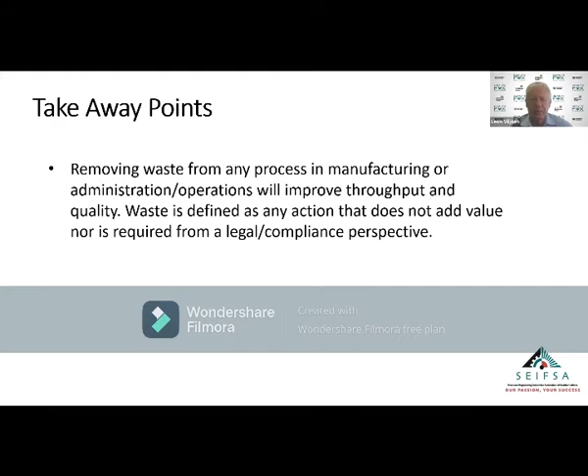Secondly, short interval control is the key to unlocking capacity in any process. Short interval control is not there to force people to work harder, but it is there to pick up and highlight problems and issues as soon as possible. This is very important. People always say, as soon as you speak about short interval control, oh, we're trying to get people to work harder. That's not the case. We actually want to work cleverer. That means we want the problems to come to the surface so we can resolve problems and people can work better and get a better output, but not necessarily working harder, actually just doing what they're supposed to do.

And clear and ongoing communication from the top, especially where the union is involved, is key to the success of improving manufacturing and operations. I've seen this firsthand, that if you involve the union from day one and there's clear and open and honest communication from the top, that they will support you and the project will succeed in the end of the day. But like we've said in previous webinars, communication is key to any change management.

In the previous one, we had partnerships and networking, let's quickly recap before we start with today's webinar. Partnerships can only work and last if they are win-win. No legal agreement will or can save a partnership if it is not built on a win-win foundation. That means there needs to be trust, there needs to be win-win. Because if you go into any partnership and one side wins and the other side loses, that partnership will not last.

A company cannot be everything to everybody, but it has the ability to grow its share of wallet with important customers by forming partnerships. That means by forming partnerships, you get products and services from other companies to go with yours to an important customer of yours. That means you get a bigger share of wallet from your customer and the customer becomes more and more dependent on you. And businesses will always be between people, doesn't matter who says what.

The better you network, the more you understand the needs and wants of your customers, as well as seeing opportunities you would otherwise not be aware of. So networking, although everybody doesn't like networking, networking is extremely important for the success of the company.

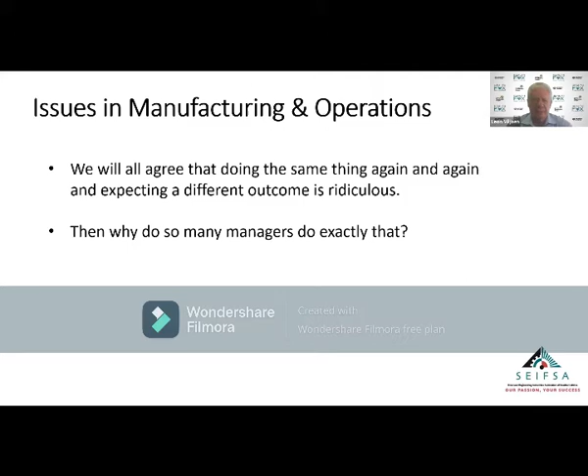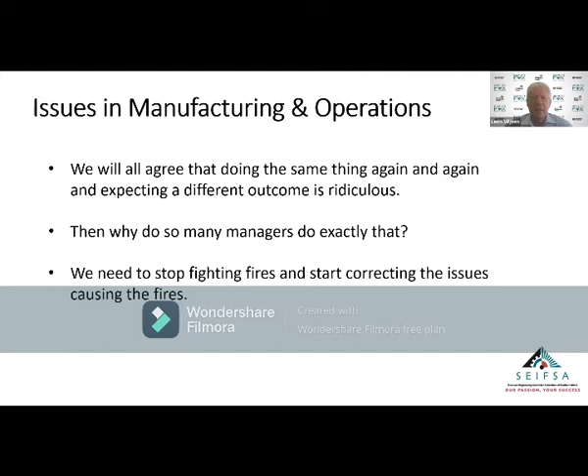Okay, let's get on with issues in manufacturing and operations. We will all agree that doing the same thing again and again and expecting a different outcome is ridiculous. This is a very old saying, and the question I've got is, why do so many managers do exactly that? They carry on with firefighting and do not correct the issues that cause the fires. So if we stop firefighting and focus on what causes the issues, then we will definitely improve the system.

Okay, let's start with it. What is waste? Let's define waste before we discuss it. Any action that does not add value, nor is required from a legal compliance perspective.

Now, in lean methodology, value can be determined by asking three very simple questions. The first question: is the customer willing to pay for the activity? Let's start there. You've got a widget and you drill an additional hole into that widget because you think customers might use that. Now, if customers are prepared to pay for that additional hole, then you're adding value. If they're not prepared to pay for that additional hole, that hole is useless and does not add value to the widget, and that means you must stop doing it. Simple: is the customer willing to pay for the activity?

Does the activity transform the good or service? That means, in your manufacturing, is it part of the transformation of the product, the activity you're doing? If it's not, then it's waste. Is the activity done for the first time? This means if any activity is repeated, that means it's not adding value and it is waste.

A common mistake made by many people is to see company procedures as law. Company procedures must be questioned to see if they add value. If they don't add value, then we need to remove or change them. If they're there from a compliance perspective, it's a different story. But if they're not from a compliance perspective, then we need and must have the ability to question it. And managers must allow people to question company procedures, because we can't afford company procedures that don't add value.

Now, for me, a comparison is waste is like running hurdles in a 100-meter sprint. If you take two athletes that have got comparable times in the 100-meter sprint, and we say to the one, okay, we're going to put in 1 or 2 hurdles in your lane, and you must go over those hurdles while your competitor runs without hurdles. Who do you think will win? Logic, the person without hurdles.

So waste is like putting in hurdles in our processes and our systems. If we don't get rid of them, we will never beat our competitors. We will always be the last one to get to the finishing line.

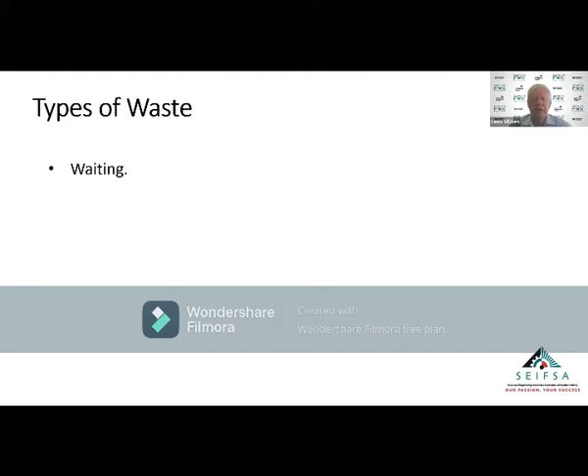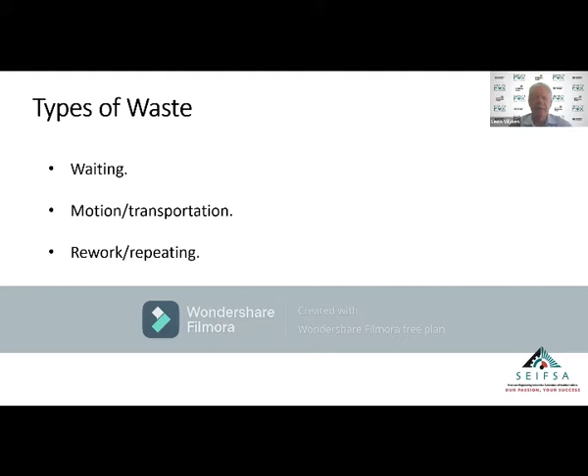Motion, transportation. Getting up to go and fetch something, or transporting a piece of material from point A to point B, and then from point B back to point A, that is waste. So we must make sure we've got the material and everything we need where we need it. Rework, repeating things - that's very logical. Nobody wants to repeat something or rework something because that's waste.

Overproduction or excessive inventory is waste in a company. We don't want to produce things when we don't need them. You want to produce things when you actually need them and when the customer needs them.

Processing, really the variance in processing. And if you've got too big a variance in your processing, that variance is waste, because then you must throw away or discard or rework quite a lot of your product.

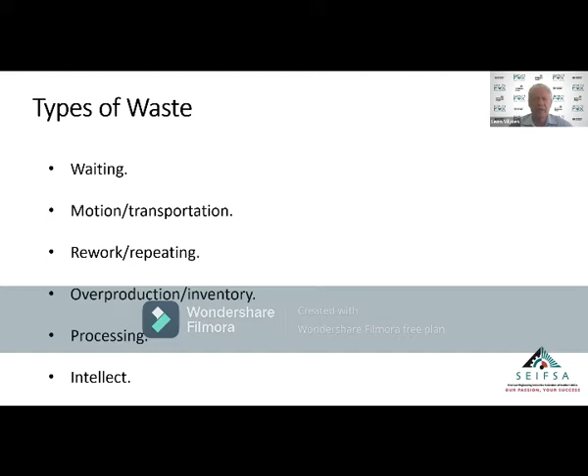And intellect. Intellect might sound very funny to say that's waste, but how many companies use the intellect that's actually in the company? And if you don't use the intellect, that is waste. So let's take these 6 and analyze each one a bit better.

Waiting. Any person waiting for information, approval, or material to continue his or her job is defined as waiting and is defined as waste. This is normally a type of waste that is easily recognizable. When you walk into an office, let's call it a finance office, and you see somebody sitting doing nothing, having coffee, or playing games, and you go to them and say, why aren't you working?

And they tell you, I can't work because I'm waiting for this information, or I'm waiting for approval. That is waste. In manufacturing, if the production is waiting for design, waiting for material, that's waiting and that's waste.

The root cause is not always determined, which results in this type of waste remaining. We see people getting used to, I'm always waiting for this material. So it becomes a norm to wait for that material. But that norm is costing the company money.

By encouraging employees to record the waiting time and the reason therefore on a daily basis, and then analyzing it maybe on a weekly basis, would clearly highlight to you where the problems in the company lie. But that's one thing we don't want to do - we don't want to record our waiting time, because then we'll get somebody in trouble. That is something the culture of the company needs to change, and this recording of waiting time is extremely important, because that can highlight to you where the actual problems are lying.

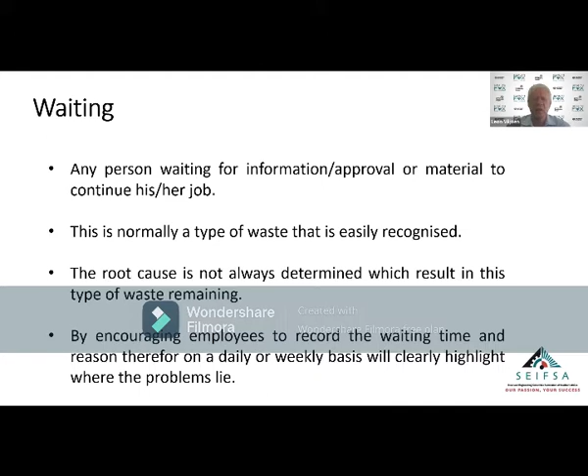Motion, transportation. An example of this is material being unnecessarily moved around.

Let's take an example in the office. If we've got a photocopy machine that's in the corner of the office and everybody needs to walk there to make a photocopy, why don't we put the photocopy machine in the middle of the office? That means everybody is much closer to it and there's much less time wasted. Or we get 2 photocopy machines.

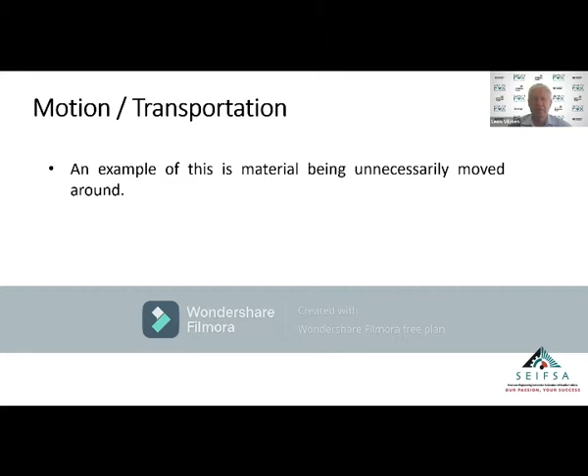People will say, no, but the cost of the photocopy machine. But take that and compare it with the time wasted when people walk around, because they don't only walk to the photocopy machine, then they also walk back and start having discussions with people on the way back. So that is wasted time. This is one of the easiest forms of waste to remove.

Workspace layouts is the big culprit. And in manufacturing, and we'll go through a real example just now, workspace layouts can make a huge difference. And the cost of something like that is not as big as people think. When you get your own staff to assist you and you move things around, you can do good workspace layouts and make it extremely good for people to move as little as possible and for everything to be there, and the impact is dramatic.

Another culprit is work methods. We don't always take the best practice and put it in our documentation. I challenge 99.9% of companies out there that tell me, when somebody joins your company, you take your ISO documentation, you give it to that person, and the new person will know exactly what to do. We expect people, co-workers, to assist that person, to tell them what to do and how it should be done.

But if we're in manufacturing and I need to teach somebody next to me how to do something, do you think I'm going to give all my trade secrets to that person? And that person, with more energy and younger than I am, can manufacture things quicker than I can. And that means I might be retrenched at the end of the day. So people tend to keep the trade secrets.

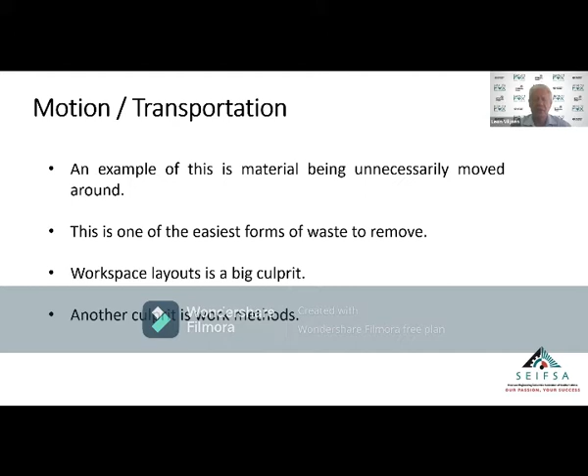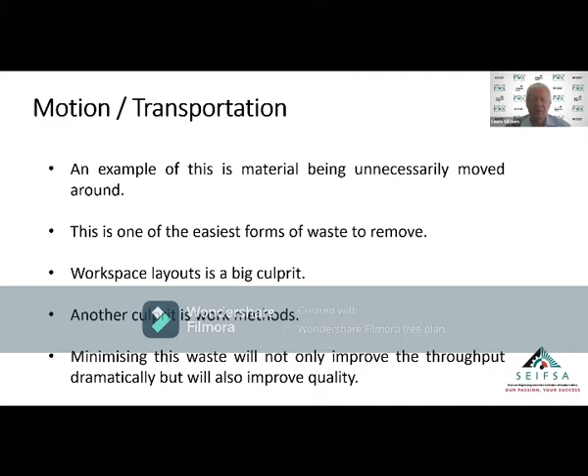And if we don't put those in documentation and get our ISO documentation and procedures actually up to scratch, so that a new person can read them and know what to do, then we haven't succeeded. This is definitely a big culprit of motion and transportation issues. Minimizing this waste will not only improve the throughput dramatically, but will also improve quality. And I will show you in the real example how much quality was improved by just getting rid of some of the waste.

Rework, repeating. That goes without saying, that is a form of waste. Actions repeated because it was not done correctly in the first place, or repeating the approval process without it adding value. And I've put in this approval process here, and I would like to discuss it because it's a big bugbear of mine. We have always got time to redo things, but we haven't got time to do it correctly the first time.

Like I said, one of the biggest culprits is the approval process, and let's have a discussion with it. We've all got limits of authority that err towards the lower side. Now I'm saying let it err towards the higher side, because then you give junior people more authority, but also responsibility and accountability.

As a manager, you need to sign orders, 10 orders a day. That means 50 orders a week. You haven't got time to go through each order properly when you approve it. That means, as an MD, I sometimes said, I'll approve this because the financial director approved it. So you don't really approve it, what is expected of you. So in this case, what I'm saying is, let's make the limits higher.

Expect the person to do not 10 per day, but 1 per day. That means 5 per week, and that 5 can be done thoroughly. And then randomly do maybe 2 or 3 a week properly. That means randomly go into the system and select an order every second day of lesser value that you don't need to approve, but approve it. That means go through it and make sure it's done correctly and approve that order.

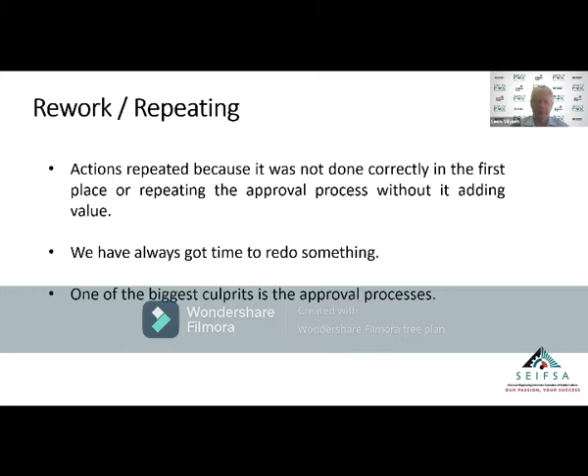Overproduction, excessive inventory - producing too many components or producing them too soon, keeping more inventory than is required. The example I'm going to show you will highlight the impact of getting rid of this, a big cultural change in a company, because we do not allow labor to sit idle and wait for material.

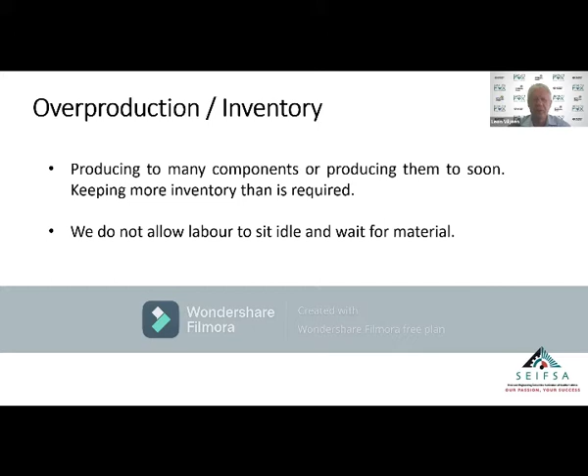Have you ever seen a works manager or production manager walking through a factory, looking at people sitting there reading newspaper during working time and not saying anything? I'll show you an example where this happened and the person was by right allowed to read newspaper because of an issue. The biggest cultural change here is not from the person doing the work, but from management's perspective. Because at times it's better to allow a person to sit idle than to do things that just overproduce, or produce things when you don't need them.

To overcome this waste, production lines must be stopped and problems resolved before they're allowed to continue. So when you've got a production line running and there's a material that's incorrect or a design issue, the whole production line must stop. We connected a buzzer, an alarm system, and a flashing light that went off. That meant the whole company knew there was a problem on the production floor. Production would not continue until that problem was resolved. That means everybody from MD right through the company, every department involved, would be involved in resolving the problem.

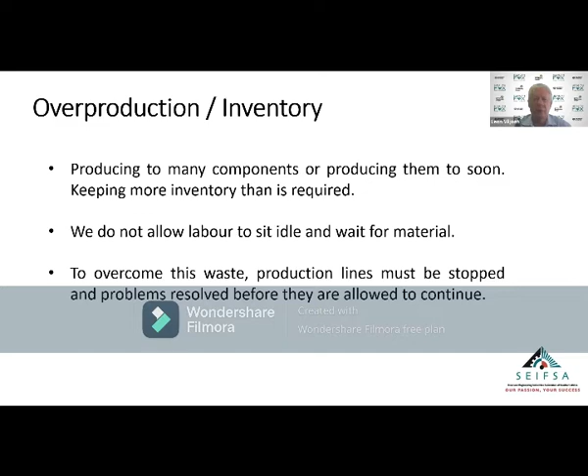It highlights your problems, and that means people know that if those problems are there, they will be highlighted. So people are much more prepared to ensure those problems aren't on the production line. This worked like a bomb - might be the wrong word to use here, but I'm telling you, it blew up all the problems we had, and we started resolving problems that made our production work much better.

This is the example - an area with small distribution transformers. People that know distribution transformers, in this area we made up to 315 kVA, 11 kV distribution transformers. This is how it looked before. You can see the amount of work in progress because there were some problems, maybe material or design or something. So we made other components, other windings, so as not to let people stand idle.

Now, if you worked in this section, would you be proud of working here? And would the quality of your work actually be good? I doubt it.

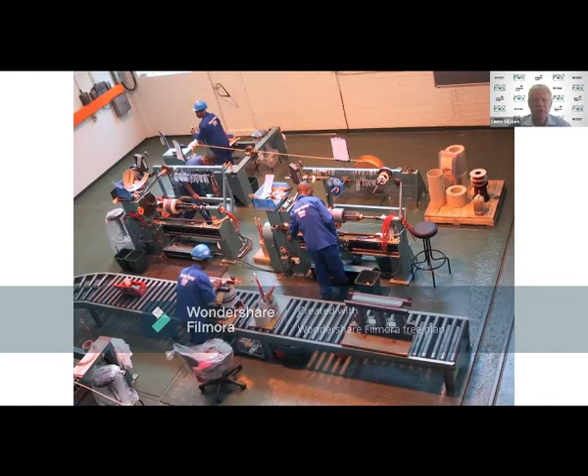After we addressed the four wastes we just spoke about - waiting, transportation, overproduction, and now I forgot the fourth one, but all four we addressed here - this is how it looked afterwards. What did it cost us? The rollers were brought in new. The rest was already there, you just couldn't see them amongst the work in progress.

Now, this is a huge change. Anybody working in this space - what do you think of the quality of workmanship that came out after this was done? Not by retraining the people, but they were more proud of what they were doing. They were proud of their environment, where they were working, and the quality of work increased dramatically.

So let's look at the actual results by eliminating the four types of waste. We produced 15 transformers per day with 25 people working roughly 1 and 1/3 shifts per day. So: 15 transformers, 25 people, 1 and 1/3 shifts per day.

After 3 months of implementing this waste elimination, we got 18 transformers produced by 22 people in a single shift. The target was 18 transformers with 20 people, and after 12 months we actually got 20 transformers manufactured with 20 people. Now that, in anybody's books, is a big achievement.

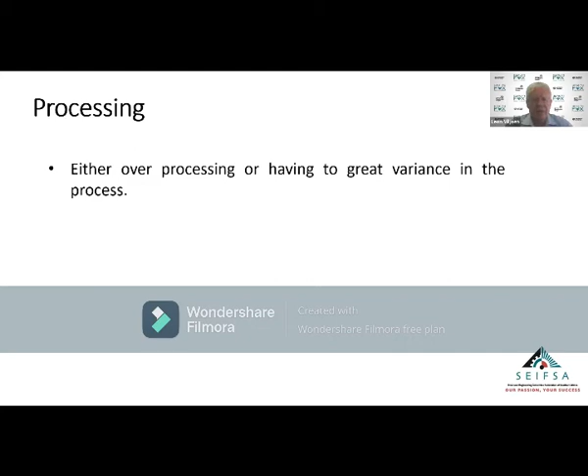Now let's address the last two types of waste, the processing waste. Either over-processing something or having too great a variance in the process. This type of waste is the most difficult to reduce or eliminate.

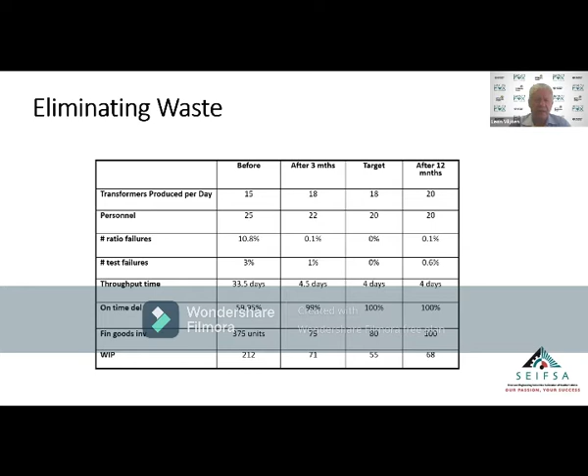But let's go back to the example I've just shown you. In that example, we said that the ratio failures went from 10.8% to 0.1%. So with the ratio testing and the failure rate, this shows that we've reduced the processing waste by eliminating the first four types of waste.

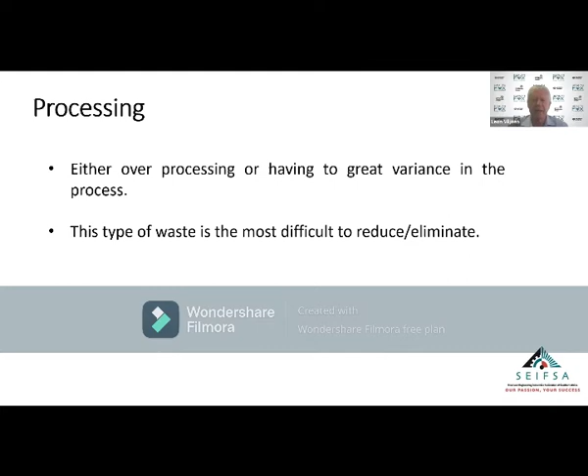By doing that first, you can start looking at the variances - the 0.1% failure rate, 0.6% test failure rate, and 0.1% ratio failure rate - and really look at your equipment and how things are done, your method provisions and things like that, because now you're addressing the correct problem. If you've got all that waste causing a lot of these variances, it's very difficult to address. You must first eliminate them, and then you can really get stuck into this.

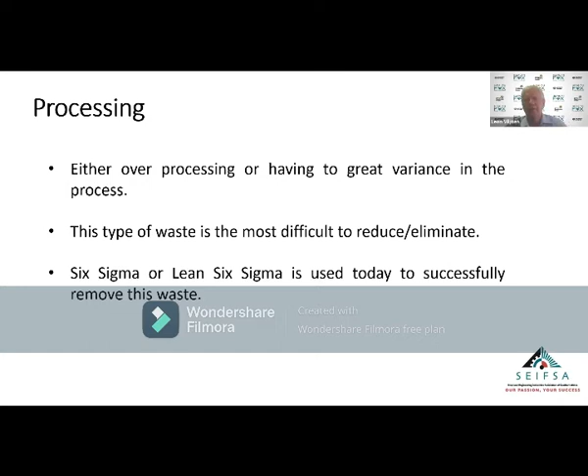Six Sigma or Lean Six Sigma is used today to successfully remove this waste. But I still maintain, remove the first four, and then your processes and your Lean Six Sigma can be used to ensure that you eliminate whatever further processing variances you have that's unacceptable.

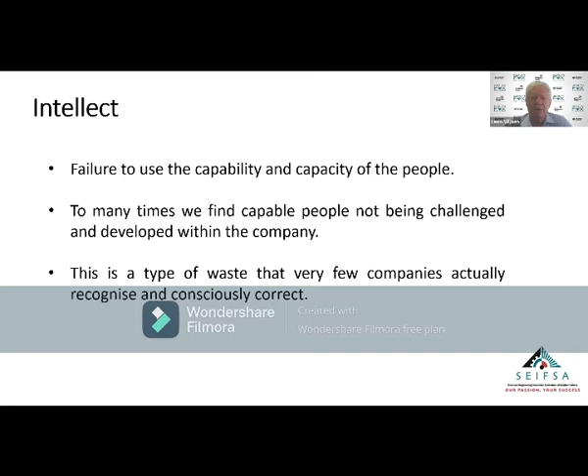Intellect - for me, a very interesting one, because I don't believe companies spend enough time on this. It's the failure to use the capability and capacity of the people. Too many times we find capable people not being challenged and developed within the company. This is a type of waste that very few companies actually recognize and consciously correct.

By addressing this type of waste proactively, companies will reduce employee turnover and improve overall morale, something that companies desperately need in today's times.

Now, where do I believe the biggest waste in intellect waste lies? I believe, if there is middle management on this webinar, middle management is the most responsible for this type of waste. Middle management does not challenge the people below them and make sure they are trained well, that we actually use their capabilities, and that they've got a career path ahead of them.

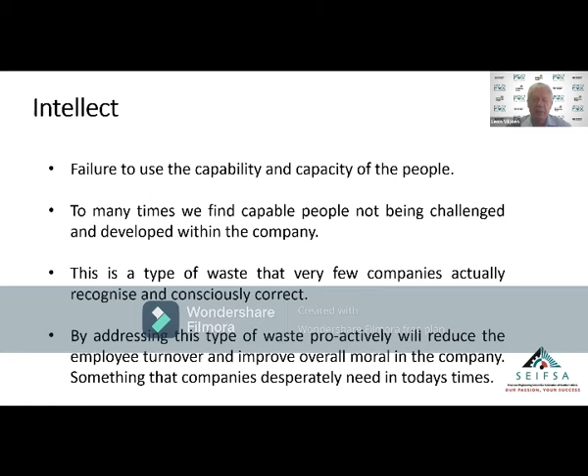Because middle management are scared of those people taking their jobs. I always said I want capable and strong people below me because they will make me look good and I can be promoted, and then they can be promoted. I think we need to get our middle management to have a different mindset, and then we can get rid of this waste and actually use people for what they are capable of, and train people so we get the full benefit of their abilities.

Let's go over to short interval control, something that's very interesting. Based on my 19 years of manufacturing experience, which includes lean manufacturing and Lean Six Sigma training and implementations, the single biggest issue that even international companies battle with is short interval control.

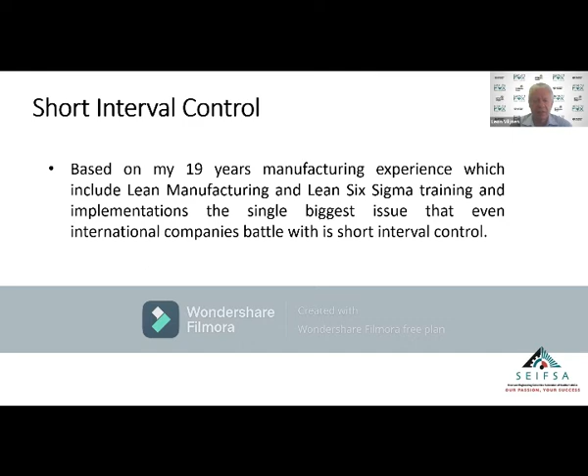I've been in many manufacturing facilities on a global basis - transformer facilities, switchgear facilities in India and China, in Europe, in Africa. And I can tell you this is one of the things that even international companies battle with, and I cannot understand why they battle with it as much as they do. If you can get this right, you have successful manufacturing and operational processes.

At least 4 of the 6 types of waste can be focused on when short interval control is implemented. That means you can make sure that when you've removed that waste, it doesn't come back. Short interval control means putting a control in place with an hourly or daily target that must be met, depending on whether you're doing it in finance, sales, or manufacturing - your time frame will be different. Take a time frame that makes sense.

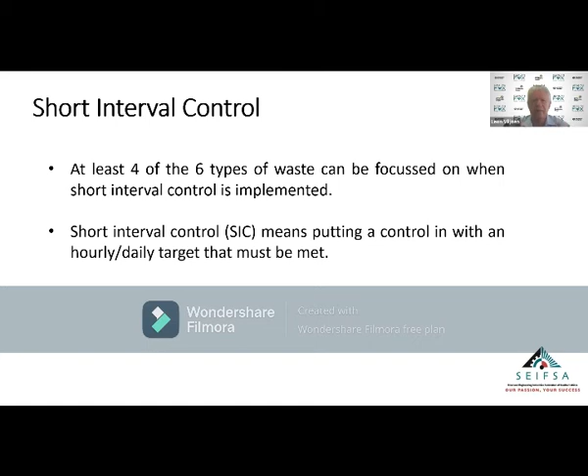Short interval control is seen as a very negative concept by labor, and in actual fact, it should be the opposite, because it highlights problems in the areas, not necessarily caused by the people doing the job, but by other circumstances.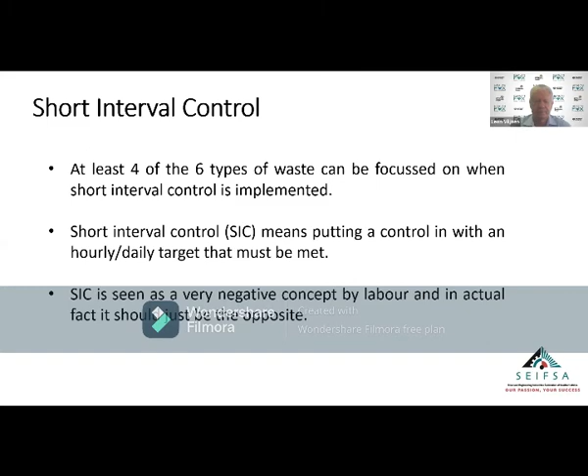Short interval control is not only for manufacturing, but also for any other operation.

In the sales webinar, it was mentioned that short interval control is important to prevent chaos at the end of the month. How many companies at the end of the month go to the salespeople and say, we're short of our target, we need to get sales, go out there and get us orders.

Why do we wake up in the last week of the month? We should have known this after the first week of the month. So what I'm saying is our short interval control can assist even in sales.

If we've got a salesperson who needs to sell 100,000 Rand in order intake per month, we take that 100,000 Rand and break it up: 20,000 for week 1, 20,000 for week 2, 30,000 for week 3, 30,000 for week 4, because we know companies order a lot of product to be delivered at the beginning of the next month, so they place the order quite late. So let's not make it 25, 25, 25, 25, but 20, 20, 30, 30. So we're fair on the salesperson.

After week 1, the salesperson comes back with only 10,000 sold. Now we need to ask the question: has the salesperson got the ability and is he trained to do sales properly? I believe, and I've said it in the sales webinar as well, that salespeople are most probably the worst trained people we've got in the company.

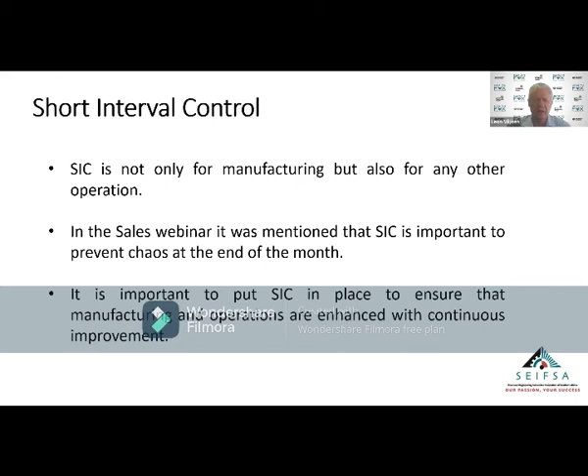With sales, it might be a week. I also see people in sales getting targets, a yearly target, and nobody breaks that target down and says we expect this in the first quarter or per month. I'm saying you need to go weekly, not monthly or 6 monthly or yearly. That's the only way to manage people properly.

Then lastly, we come to communication. With any type of change within the organization, communication is one of the most critical aspects that determines the overall success of the initiative, of the intervention.

Communication is absolutely critical, and I think it's one of the things we totally underestimate and don't do enough of. Most, if not all, manufacturing companies have trade unions involved. So why don't we, when we want to do these things, call the trade union in, tell them what the position is, what we're trying to achieve, how we're going to achieve it, and let's work together with them.

I did it in one company at 3 sites with 3 different trade unions, and all 3 bought into the process. Why? Because number 1, senior management engaged with them before we started the process. We gave them feedback on a continuous basis, to the point where when we spoke to them and told them what happened, they would just say, yes, we know. And there wasn't much discussion needed.

They bought into the process because they saw the benefit of what we were trying to do to make the company sustainable, to ensure their people have got jobs, and to make the whole environment for their people much better. So we need to start communicating early and continuously, and not by the HR person, but actually by senior management with the unions.

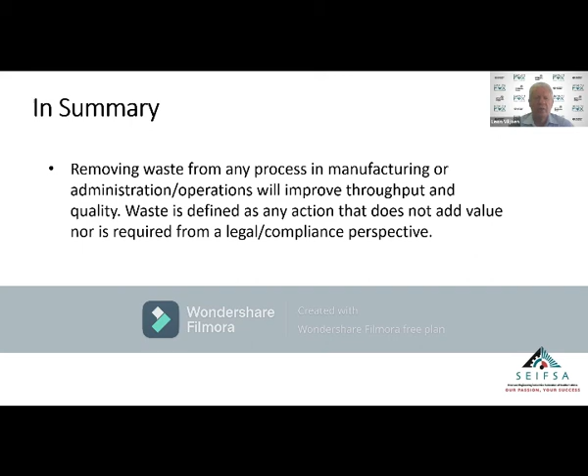And it was due to removing waste. Waste is defined as any action that does not add value. Remember the 3 questions, nor is required from a legal compliance perspective.

Short interval control is the key to unlocking capacity in any process. Short interval control is not there to force people to work harder, but it is there to pick up and highlight problems and issues as soon as possible.

Clear and ongoing communication from the top, especially where there is union involvement, is key to the success of improving manufacturing and operations. And for that matter, it is the key to success of any change initiative.